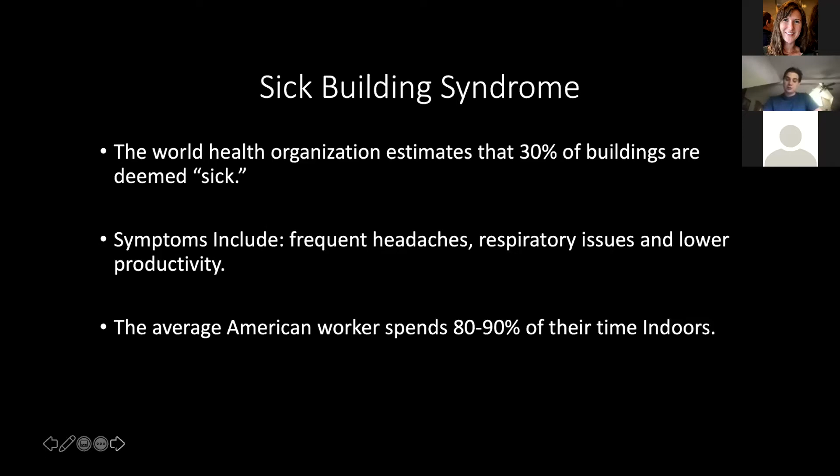So this has actually gotten worse in many ways, especially in the past few years, now that they're looking at this as not just for sick building syndrome, but for other sick-based syndromes as well. In order for meaningful progress to take place and to really find a root cause to this problem, change does need to start from the bottom, which really comes down to where we source our raw materials from.

These have a number of advantages over their petroleum-based counterparts in this regard, mostly that they're renewable and sustainable. They're very popular with consumers and they're non-toxic, meaning that they can be created without the addition of formaldehyde and other volatile organic compounds. So looking at green material here, which is widely looked at as the way to combat this.

Essentially what the construction industry is looking for is a raw material that can be grown locally, sourced locally, remediates the environment, and also provides for environmental and health concerns of the occupant. But if we're looking at a raw material, what would be the best one to do something like that? Industrial hemp is a standout in this regard and is relatively new to the national discussion, but its roots in world civilization date much further back than the past few years.

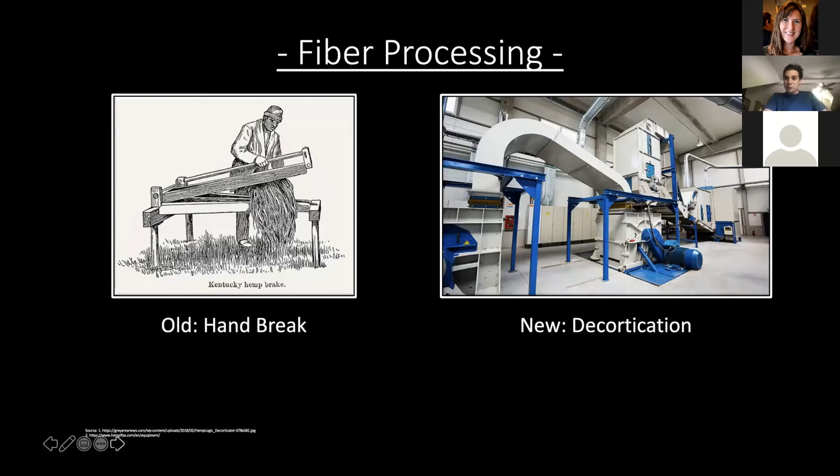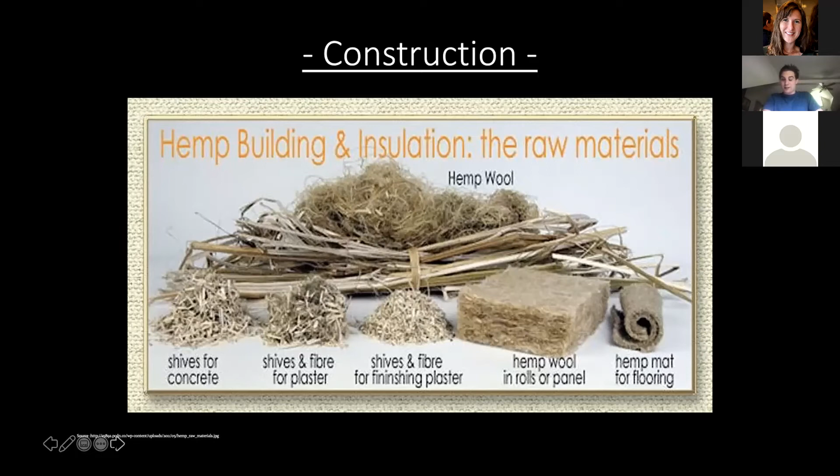It's very, very simple and renewable and easy to work with. This is one of the reasons that hemp, despite being in the early stages of its growth cycle, is already finding applications with do-it-yourself enthusiasts due to its simplicity. Some of these are in the basically mainstream staple construction products. You're seeing this for plasters, for hemp matting, for batt insulation, and for building materials, such as hempcrete.

So hempcrete is a biocomposite made from mixing hemp hurd with a binding material. The modern iteration of hempcrete originates in the 1980s, where it was used in France for building restorations where Portland cement was not a viable option. However, that being said, the history of hemp use in construction, hemp mixes specifically, goes back much, much earlier than the 1980s.

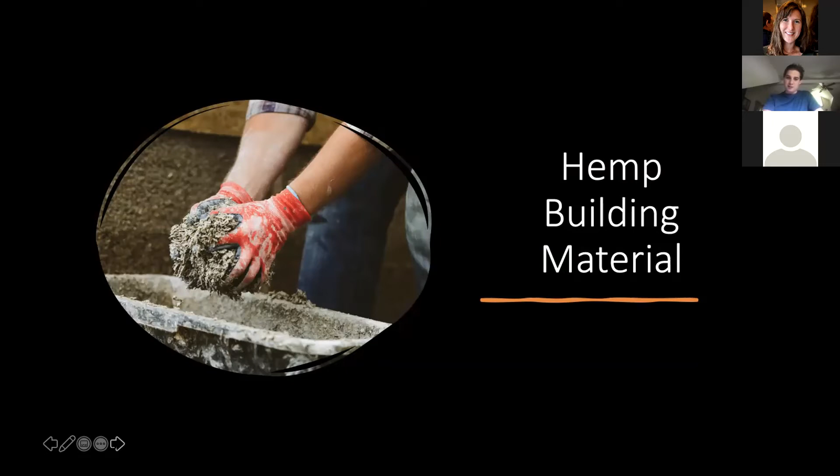The oldest known hempcrete structure still in existence and still operational today is the Sarthe River Bridge in France. This bridge was built in 500 AD and has withstood Viking conquests, multiple world wars, natural disasters, and the punishing current of the river below. A hemp mortar made of 10% hemp was the glue that kept the entire structure together and preserved the structure much more than many of the other regions in the building. This is a very, very important bridge for the history of the town and has survived longer than many of the other ancient buildings in the town, despite those buildings not being right above a large, fast-flowing river such as the bridge was.

What was interesting about this too is that this region is very, very highly prone to decay for these art forms, since the average annual humidity of the region is 70%. So the preservation of this type of artwork has been very, very difficult. The way this was handled was the Buddhist monks who prayed in these caves used a mixture of hemp, clay, and a lime plaster to preserve the ceilings, the shrines, as well as the walls of the building.

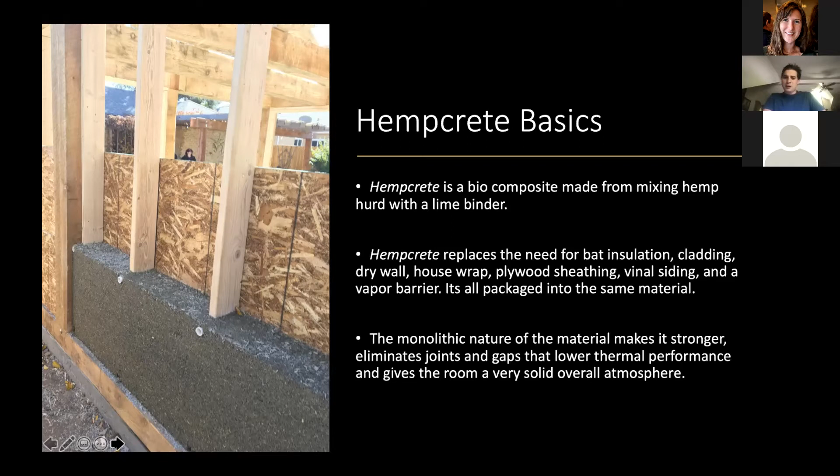A hemp wall replaces the need for batt insulation, drywall, house wrap, plywood sheathing, vinyl siding, and a vapor barrier. It is all packaged into the same material. The monolithic nature of the material makes it not only stronger, but it eliminates joints and gaps that lower thermal performance and gives the room a very solid overall atmosphere. So with the monolithic nature of this material, everything is incorporated into the wall. Oftentimes hempcrete is compared to other insulation materials, but it's good to remember when looking at this that this is the entire wall.

So hempcrete is comprised of 3 ingredients: hemp hurd, a binding material, and water. That's it, just 3 major ingredients. Lime is most commonly used as a hempcrete binder due to its vapor permeability, its durability, and its fast drying time. Both hydraulic and hydrated lime can be used in hempcrete mixes. However, the hydraulic lime is preferred by hemp builders simply because it has a hydraulic set. For those of you who are not familiar with the building science there, that means that the water, not air, initiates the chemical reaction that causes the material to harden.

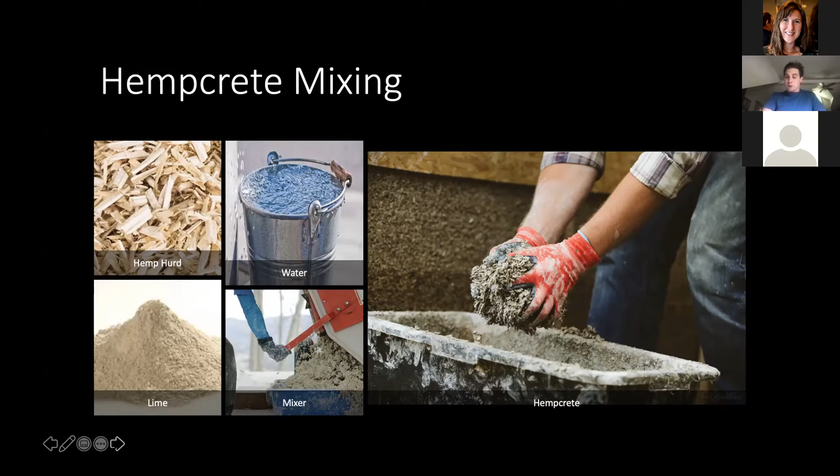Once the low density and porous hemp hurd is added to the lime, it creates an intricate matrix of micro-sized air pockets within the wall. What this results in is a low density material that is highly durable, holds its shape even when wet, and maximizes the insulation value. Once the mixing is complete, the material is very fluffy and very sculptable, as you can see here. It can be incorporated into a number of different shapes and fit a number of different molds that the builder might need. Hempcrete is generally mixed in a pallet mixer, but you can do it by hand as well if you're working on smaller buildings.

The next steps are pretty simple. After the material is mixed, it is poured into a framing apparatus layer by layer and then tamped until the desired density is achieved. The properties of the material are determined by the ratio of binder to hurd as well as the compactness of the tamping. So lower density mixes are tamped less than higher density mixes. So yeah, there's a lot of customization available there.

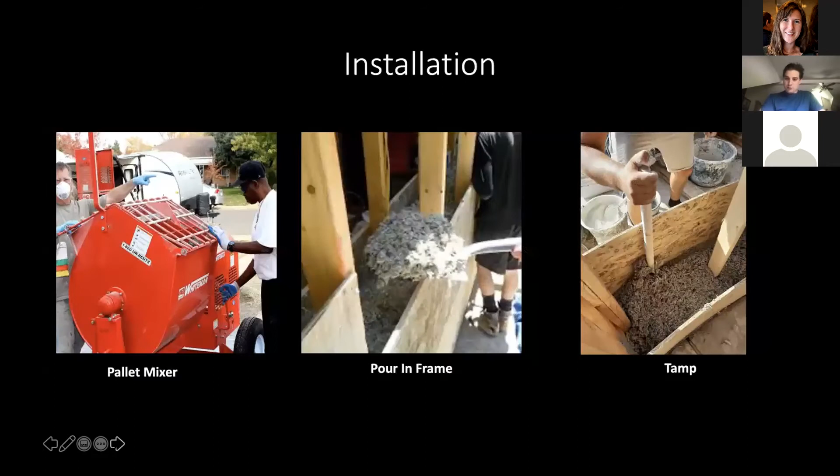So after the material is placed into the framing apparatus, it's ready to dry. This happens in 3 stages. The first stage happens in the first 24 to 48 hours after the material is placed. This is where the majority of the drying takes place. It goes from a very wet, oatmeal looking material there. And after about the 24 to 48 hour mark, that's when it starts to hold its shape and you can remove the shuttering from that, the shuttering being the framing apparatus that the hempcrete was placed into.

It then slowly begins to cure for around 28 days. This is much more gradual than the initial set, but after the 28-day mark, it is functionally dry. However, the drying essentially in phase 3 happens indefinitely, as the material gets harder and harder as the building ages.

So as it does this, it actually absorbs CO2 to basically keep catalyzing the limestone as it gets harder and harder. So the carbon sequestration of the drying process for the homeowners is essentially indefinite, which allows basically a permanent but small carbon sink throughout the building's lifetime. Concrete does this as well, but given the energy it takes to create Portland cement, these effects are fairly negligible.

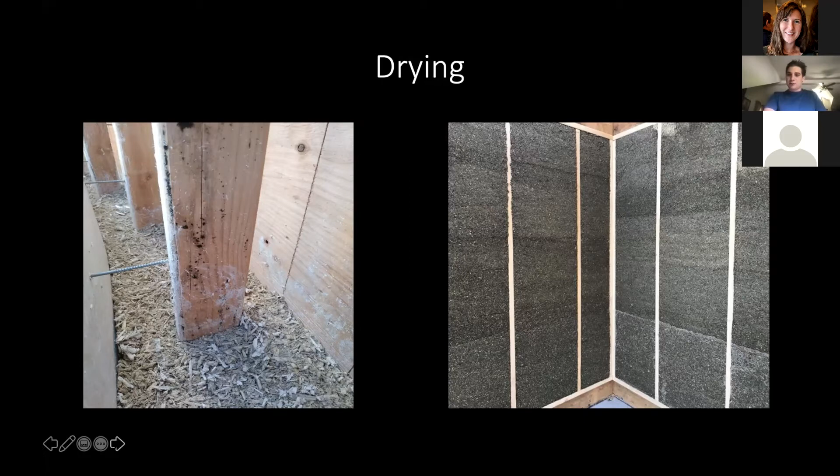So after the 28-day mark, the material is ready to be plastered. This is both to create an air seal, but also for aesthetic purposes. After this time, the material can be painted as long as the paints are vapor permeable, usually a lime-based paint. Also, sidings and other finishes can be added, allowing a range of design options to be pursued by the building team. Again, I can't stress this enough. One of the benefits of hempcrete is that you're not limited in the design space. So you do have a number of different finishing options that can work with a variety of different design and building styles.

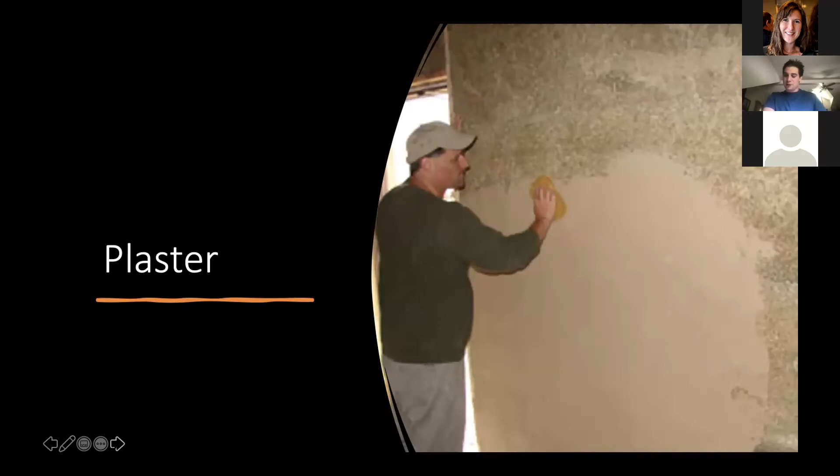So hempcrete can be used for wall applications, for roofs, and for flooring. The density of the mixture determines which application the material is best suited for. So a lower density mix, which maximizes the thermal performance, is generally mixed for walls and roofs, where that is commonly valued. Whereas in applications like floors, you generally have a more structural material, meaning higher compaction rates, and generally you use a little more binder to hurd if you want to make a denser material.

Again, there are a lot of customization options available here. So it is entirely possible for the mix to be built or customized to the exact needs of the application at hand. While lime is commonly used, there are many other hempcrete binders available, some of which are clay, magnesium cement, and even Portland cement if you want a more structural based material.

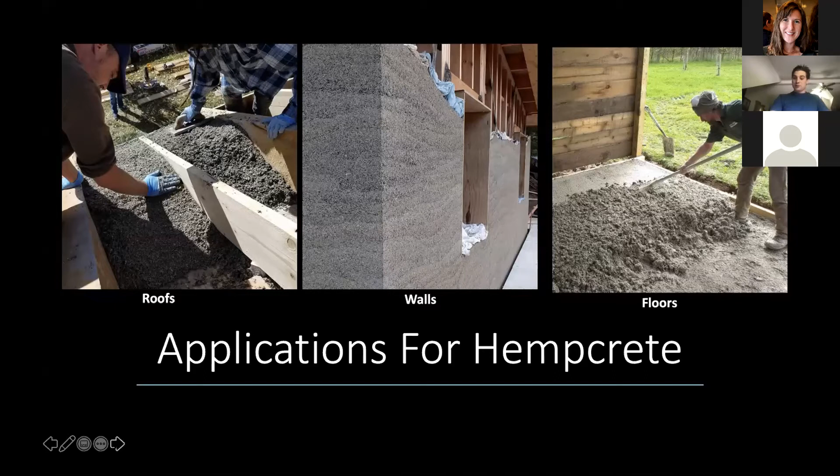So hempcrete is installed using essentially 3 different methods. The first is cast in place. This is essentially what we just described above. The material is placed into a framing apparatus and tamped, and the shuttering is removed once the material is dry. This is by far the most common form of hemp construction and has a lot of advantages, most of which is that it's very simple and low tech.

Generally, hempcrete is used with a pan mixer, but in cast in place, you can essentially do all of this by hand if you want to. It's very easy to pick up and go. The barriers to entry to learn this are much lower, and the material is much easier to customize, especially for new mixers. If you make a mistake, it's very easy to add a little bit more water, a little bit more lime, and just start again. The downside of cast in place is that it is the most labor intensive of all the styles, and it is generally the slowest. This is just due to the fact that you're limited by the size of the pan mixer, and pouring by hand is functional, but it is slower than some of these other styles.

The next is spray applied. This works by using a device similar to a cellulose sprayer. This sprays the material into the wall or roof cavity, and then it dries and holds its form right there. This has a number of really big advantages, and is starting to be used in commercial buildings. The main thing is that it reduces labor and time substantially on the build site. The minimal crew you can use for just the hempcrete part of the job is in the 2 to 3 people range, where cast in place is going to be double or triple that.

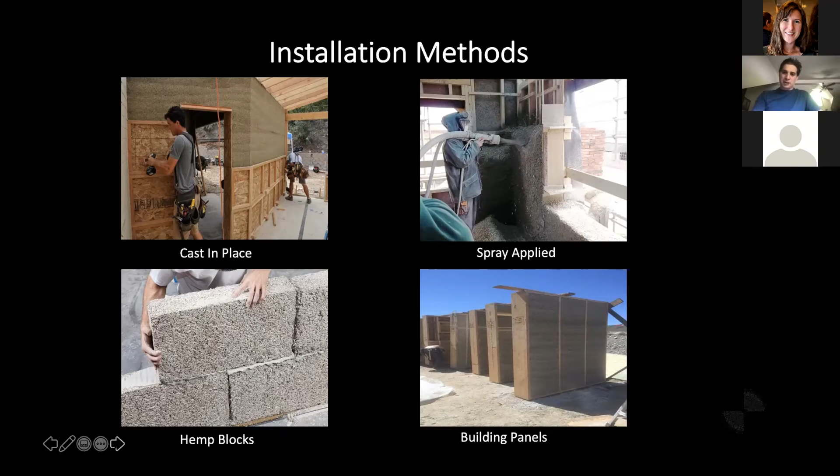So despite the name sounding like concrete, hempcrete is not a foundational material. It is an infill and insulation material. You can increase the structural properties of hempcrete by using binders such as Portland cement. However, this is not really the best use of the material. It is not where the material really shines compared to its counterparts in the green building space and in the mainstream construction space. These are the properties that really define why hempcrete is really a breakout star in the green building world. Let's look at some of these in detail.

So first is the fire resistance. Hempcrete is highly fire resistant due to the presence of the lime binder. Hemp homes are capable of withstanding temperatures of up to 5,000 degrees. And yes, both European and American burn tests have confirmed this. When the tests were performed, there was nothing ignited, burned, or smoked while this took place.

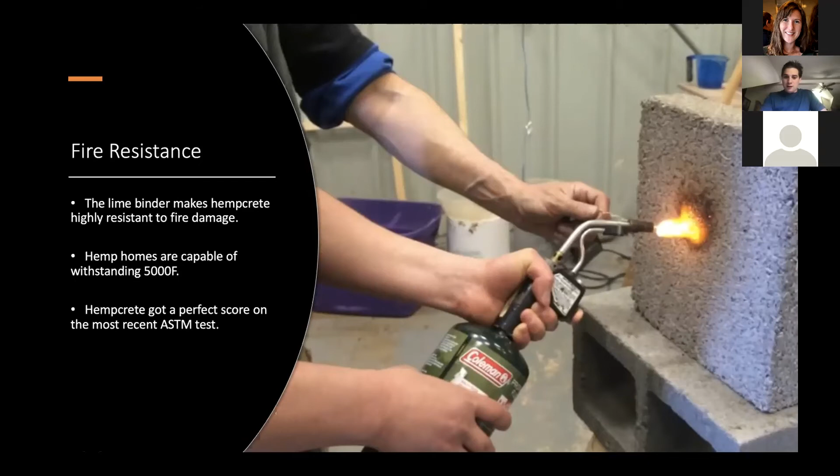As you can see in this picture, I think you guys can see it right here. Move that over there so you guys can see it. There's some slight charring on the surface, but overall you can see the structure of the material is still very much intact. It's not compromised by the high temperature of the flame. And again, that's a propane blowtorch put right at the surface of the material. In the most recent ASTM test, hempcrete actually got a perfect score. This was due to the fact that there was zero flame or smoke spread. So from a fire perspective, the data is there and it is very, very positive on the hemp end.

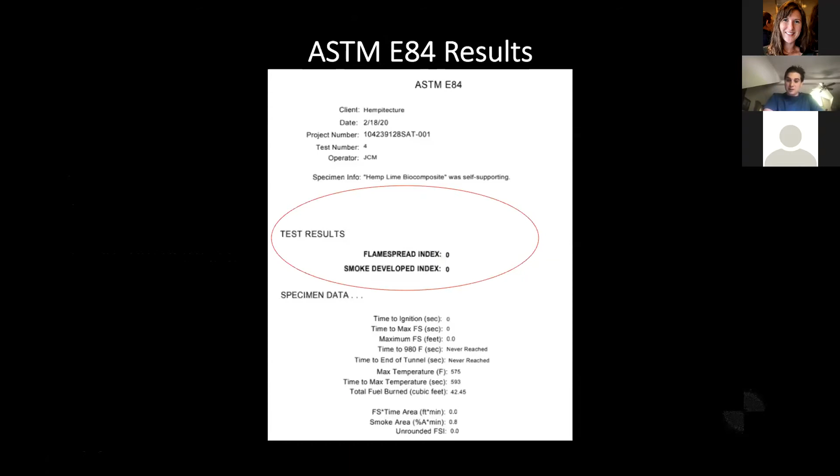So next is the thermal properties. Hempcrete has really great thermal performance due to its high thermal mass, low thermal capacity, and low thermal conductivity. Air pockets within the wall system allow heat to be stored within the wall matrix, which impedes the flow of heat from one side of the wall to the other. With the addition of the lime plaster, this further impedes the air movements while not providing a perfect seal. That's what's really key about this.

What this translates to is that the wall breathes and passively regulates the temperature of the building, resulting in rooms that are cool in the summer and warm in the winter. This can also make buildings that are very comfortable to be in. This is very different than how conventional insulation materials seal everything in and then require a mechanical system to remove the extremes of the temperature spectrum. European homes with hemp walls have actually been able to remove these systems entirely, basically relying on the hemp wall to keep the temperature consistent enough, and don't really need these systems.

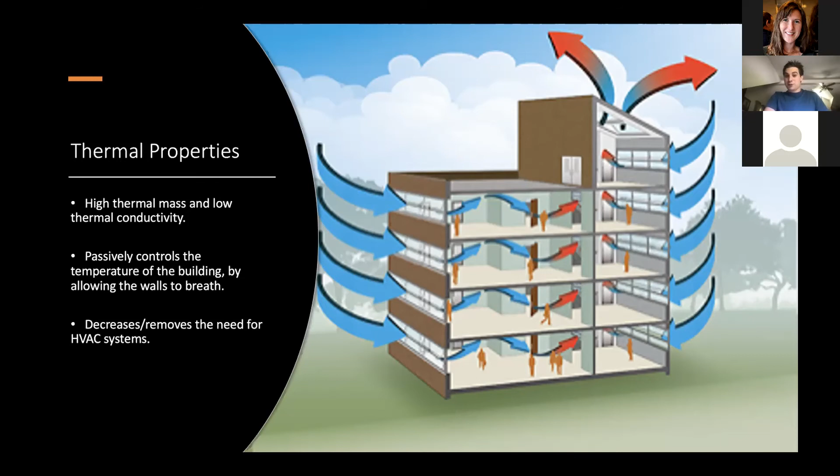Obviously, this is optional and very much dependent on the lifestyle of the occupant. But for those who have incorporated that to its fullest potential, they've reported savings of up to 60% on their energy bill. So this is a good demonstration of this here.

In this chart, you see that this is monitoring for both external temperature and internal temperature. This is a hempcrete wall being tested in real time without an HVAC system or any mechanical apparatus. The red line you can see is the external temperature. We can see that this is absolutely darting all over the place, and the orange line, which is the indoor temperature, stays very consistent.

This is where this creates rooms that are very, very comfortable to be in because the temperature is consistent and you don't need to jack up your energy bill in order to maintain that.

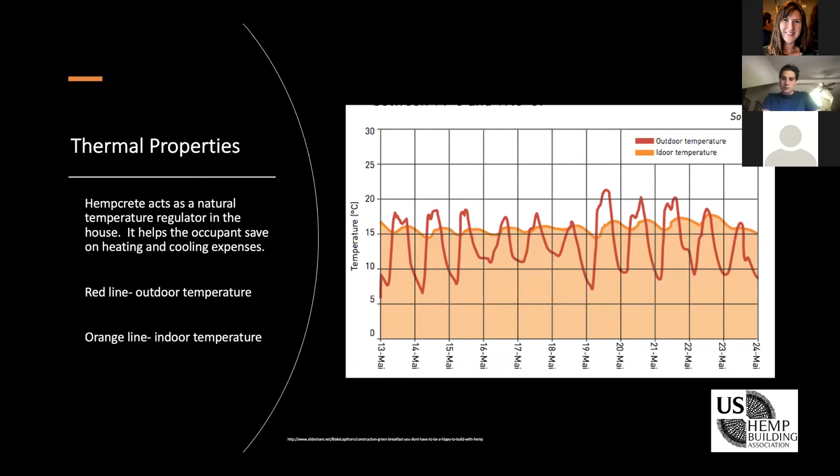So next is the humidity properties. Just like with temperature, hempcrete can create an internal humidity that is consistent. Homeowners can enjoy a relative humidity of about 55%, with the wall system absorbing and releasing excess water particles. The term for this is hygroscopic.

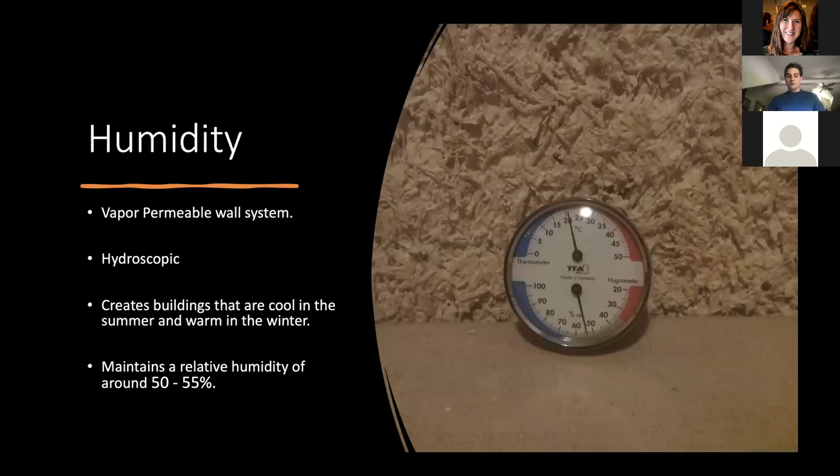This makes it so that hempcrete performs very, very well in wet environments like the UK, since the excess moisture does not get trapped in the wall system. Again, this is very, very different from airtight insulation systems where water damage trapped within the wall system can create mold growth or cause the entire wall to fail.

So let's understand the properties of how this works a little bit clearer, because this is really key to fundamentally understanding what makes hempcrete a breakout in this regard. So this is the microstructure of the hemp hurd viewed through an electron microscope. As you can see, the hemp hurd, which is the inner woody core of the hemp plant, is filled with these micro-sized capillaries that you can see here.

These form to move water from the bottom of the plant all the way to the top of the plant. This can be up to 15 feet. The structure allows the hurd to absorb a disproportionate amount of water compared to its small size. When the spongy woody material is mixed with a vapor permeable binder like lime, the micro-sized capillaries absorb the excess water, store it within the wall system, and then release it.

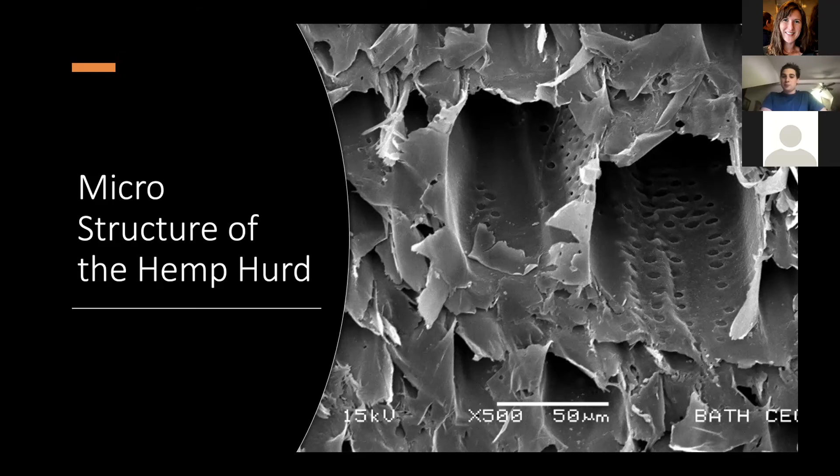So next we get to mold and pest resistance. The hempcrete wall is very, very resistant to both mold and pests. This is again due to the presence of the lime binder. Mold grows at a pH of between 3 and 7. As most of you farmers will know, lime is alkaline with a pH of 12.

Also, going back to the humidity properties that we just talked about, because there's no water buildup, mold growth within the wall system is going to be very difficult or non-existent. So this, put together, makes a very, very inhospitable environment for mold.

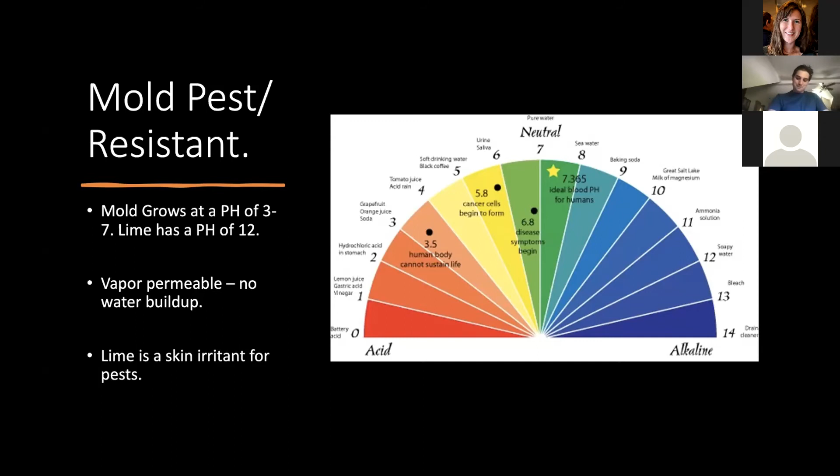As far as pests, lime is a skin irritant for pests, just like it is for humans. When you're mixing lime, you do need to wear protective gear, but when the lime is solid within the wall, then it's the opposite. It's very, very healthy, unless you're burrowing through it. So I don't recommend trying to eat or nest in the wall system, which is why rodents and insects are not going to be eating your hemp wall. Next is durability.

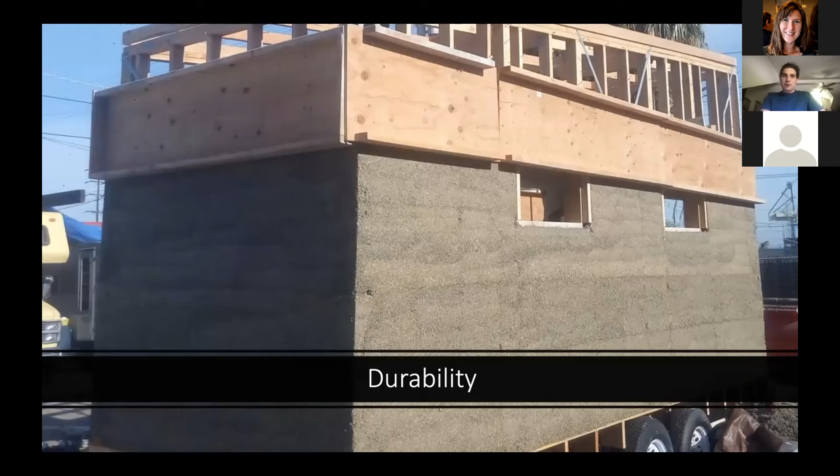Hempcrete is highly durable, with walls lasting for more than 100 years, as you can see with some of our earlier examples. There is minimal to zero maintenance required for hemp walls because they're very low tech and very, very resilient. If a wall does need to be replaced for whatever reason, a new batch of hempcrete can be mixed. It can be reapplied to the wall, no problem, and dried and plastered. And if it's done by a hempcrete builder or whoever built the house in the first place, you shouldn't see any difference there. So it's very, very moldable and very, very durable even over long stretches of time.

Hempcrete is not only carbon neutral but carbon negative. That means it sequesters more carbon during its production than is emitted in the production of the material overall. Again, to understand this, we go back to the raw component parts. The hemp hurd, or the industrial hemp plant, has the fastest CO2 to biomass conversion ratio found in nature, even more than agroforestry. While the lime does produce a somewhat substantial carbon footprint when it's produced, it's much lower than Portland cement, and due to the high sequestration in the growth and build phase as the wall sequesters, it's still carbon negative even with the added lime.

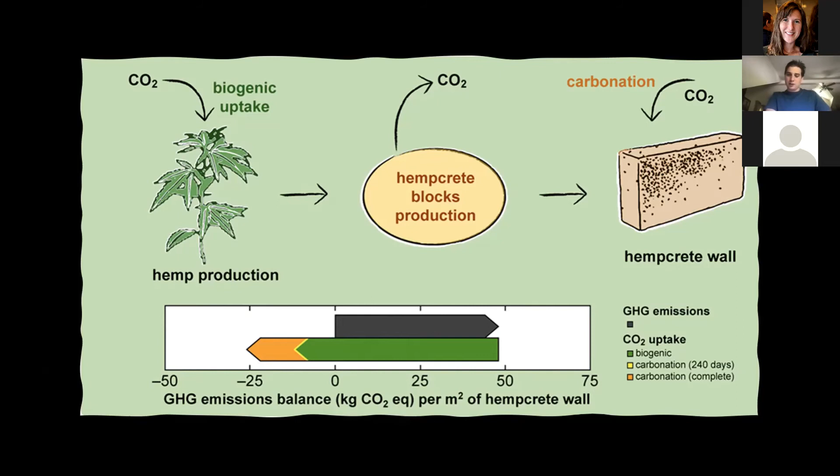You can also use more environmentally friendly binders like magnesium cement and clay as the binder. Those are a little bit more expensive, but you can make it even more carbon negative if you do that. Not only that, hempcrete is carbon negative for both operational and embodied carbon. So that means it's carbon negative for the production process, as well as when you add the heat and energy savings caused by the operation of the hempcrete wall. So this is a double whammy on the sustainable end.

Hemp hurd is a natural agricultural byproduct, and lime is an earth-based material. Both can be produced with no toxic additives or any volatile organic compounds added to the production process. There's also zero off-gassing at any point in the production. The alkalinity of the lime prevents mold growth while also passively regulating the humidity. The breathability of the material inhibits the spread of viruses and bacterial infections that also thrive in these wet environments, especially in the ventilation systems like this example here. So yes, in high humidity environments, you are more susceptible to mold and sick building syndrome, as well as airborne viruses. So a natural building material like hempcrete is a very good solution to fixing a lot of the root causes of sick building syndrome in buildings.